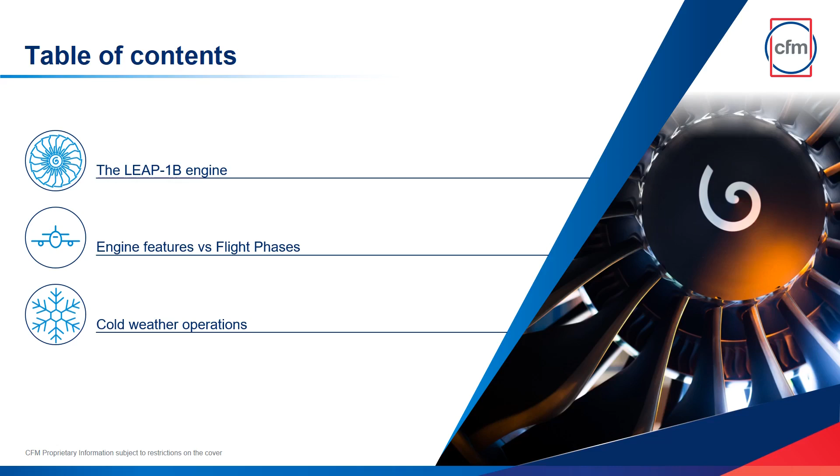We will go through the following topics: the LEAP 1B engine features versus flight phases, from pre-flight phase to engine cool-down, and cold weather operations. Let's begin with a short technical review.

Fuel burn. The B737 MAX has been designed to reach a close to minus 15% fuel burn compared to the NG family. This target has been achieved thanks to design improvements made to the airframe, but most of it is due to a new generation of engines, the LEAP 1B family. On top of that, NOx emissions have been lowered by 50%, and the noise footprint reduced by 75%.

From the outside of the aircraft, the LEAP 1B is bigger than a CFM56-7B. The jet intake is 1.76 meters wide, which is 20 centimeters bigger than the one on the CFM56-7B.

The ground clearance is 43 centimeters, which is compliant with all the certification rules, and does not induce any limitations in bank angle for landing. Even in the case of a landing with the nose wheel retracted, the engines will not touch the ground.

The improved fuel efficiency of the LEAP 1B engine is due in part to its larger fan. The LEAP's new bypass ratio is 9:1, compared to the 5:1 bypass ratio of the CFM56-7B. The larger bypass ratio is responsible for 50% of the LEAP 1B's gain in fuel efficiency.

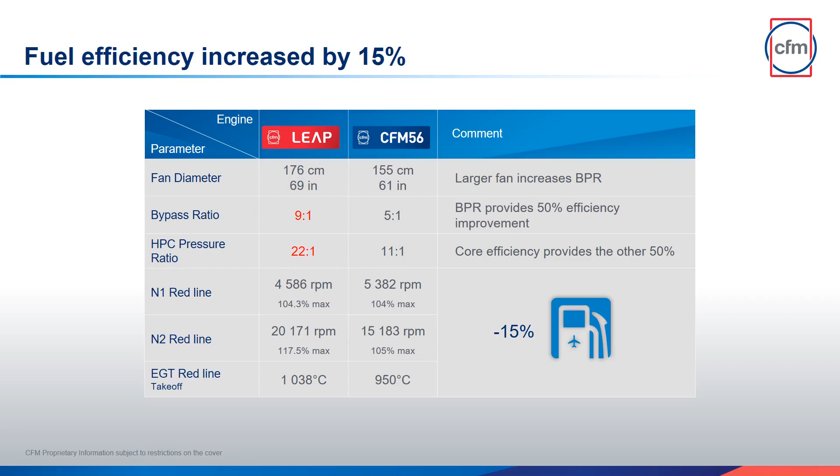Aft of the fan, the majority of the air flows into the secondary airflow, where approximately 80% of the engine's thrust is developed. The remainder of the air passing the fan enters the engine's core, becoming the primary airflow.

Primary air flows into the three-stage low-pressure compressor, also known as the booster. Between the booster and the high-pressure compressor are the variable bleed valves, or VBVs. The VBVs are designed to avoid stall occurrences in the booster by discharging a portion of the booster's air into the secondary airflow, while the engine is operating at low RPMs or during sudden RPM changes.

The VBVs open into the primary airflow and behave like scoops, catching any foreign objects that could have been ingested by the booster and evacuating them into the secondary airflow, bypassing the engine's core.

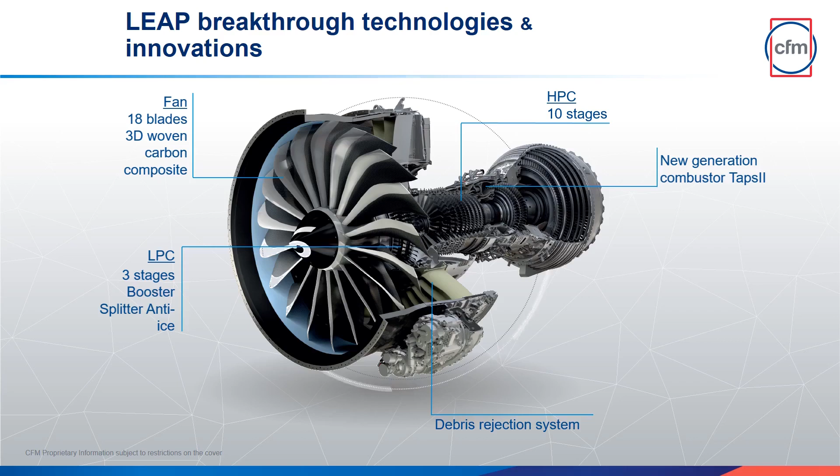After the combustor, the hot exhaust air goes through a two-stage high-pressure turbine, or HPT. The first HPT stage is surrounded by a ceramic composite shroud, and the second HPT stage is surrounded by a cooled metallic shroud. Before leaving the engine, exhaust air passes through a 5-stage low-pressure turbine, or LPT.

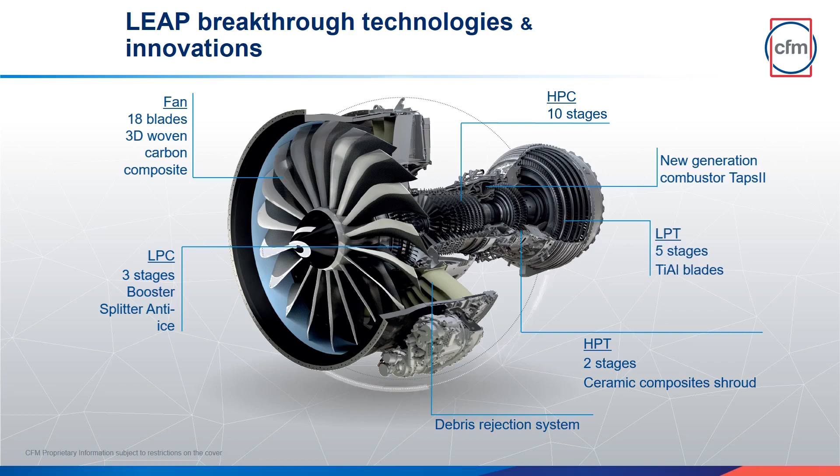The LEAP 1B family of engines provides a range of thrust from 23,000 pounds to 28,000 pounds. The only difference between these engines is the delivered thrust. The hardware is the same, but the ID plug is different. The ID plug is an electronic device plugged into the engine's FADEC computer that changes the operating characteristics of the engine, resulting in changes to its maximum thrust output.

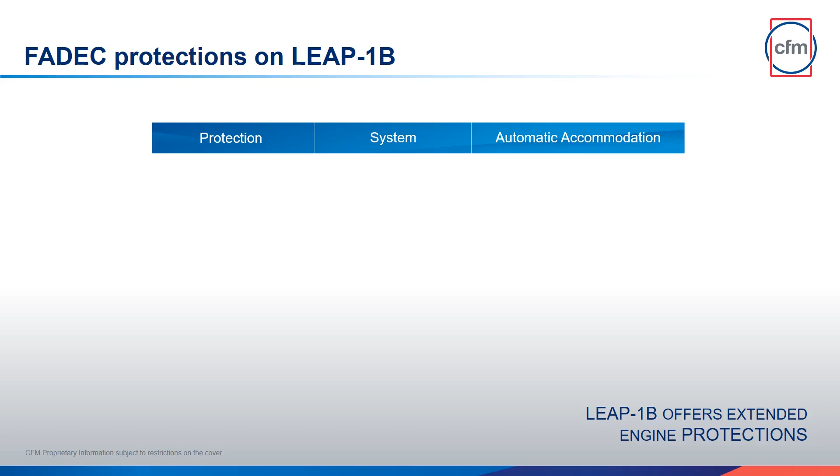Engine protections. The engine control is called FADEC, for Full Authority Digital Engine Control. Beyond basic engine control, the FADEC also actively protects the aircraft. In case of an N2 engine overspeed, an electronic overspeed system, EOS, independent from the main engine calculator, will command an engine shutdown to prevent it from bursting.

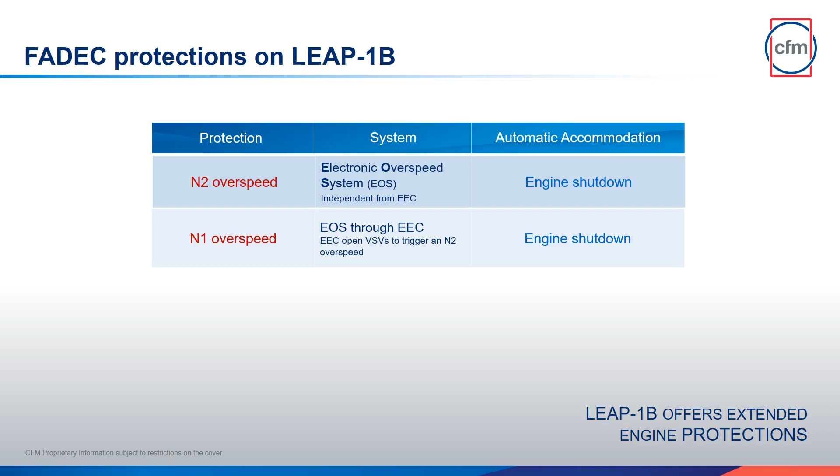In case of an N1 overspeed, the main calculator will detect it and will trigger the EOS, resulting in an engine shutdown as well. Furthermore, to satisfy certification rules, the engine is equipped with a Thrust Control Malfunction Accommodation Device, known as TCMA. In case of an abnormal commanded engine deceleration, to avoid any lateral loss of control due to an excessive thrust dissymmetry, the TCMA will command an engine shutdown on the engine that is not responding normally. This device is only active during takeoff and touchdown phases when on the ground.

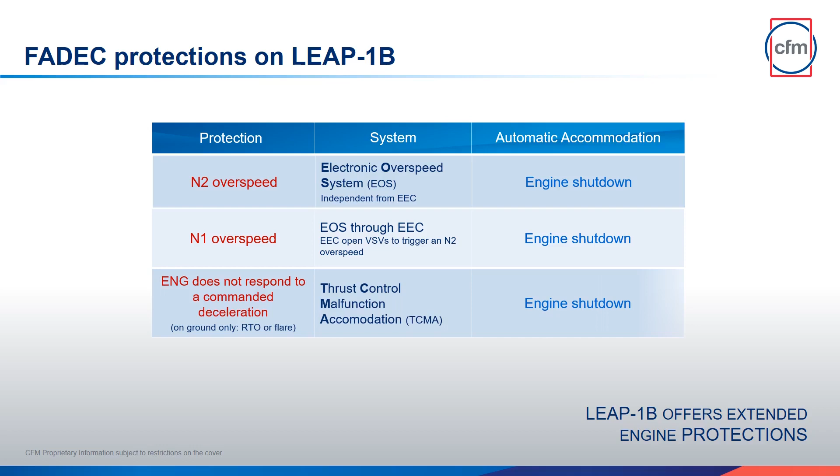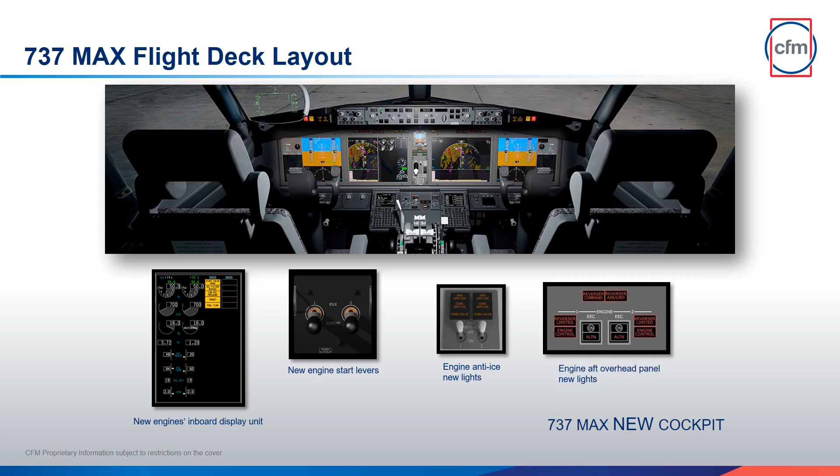On the engine parameter display, you will find 2 new lights. The thrust alert light, which will light up if the thrust is different from the commanded thrust or if the N1 goes above its amber limit. And the fuel flow alert light, in case of an abnormally high fuel flow.

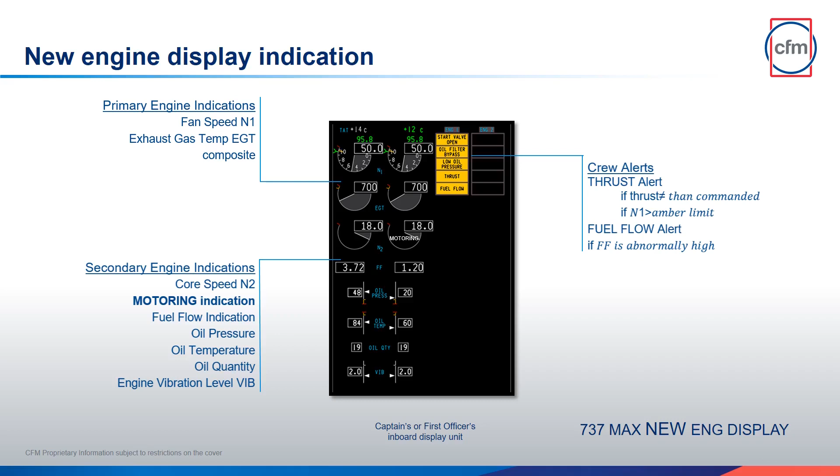The engine start levers are equipped with a red light which will illuminate in the event of an engine fire or during an engine fire test.

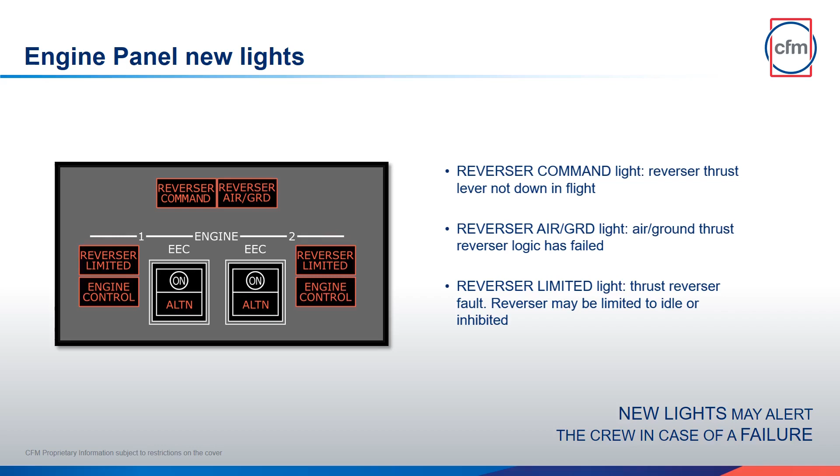The engine panel is also equipped with new lights. The reverser command light will illuminate if the reverser lever is not down in flight. The reverser air ground light will announce the air ground reverser logic has failed. And the reverser limited light will illuminate in case of an inhibited or idle limited reverser.

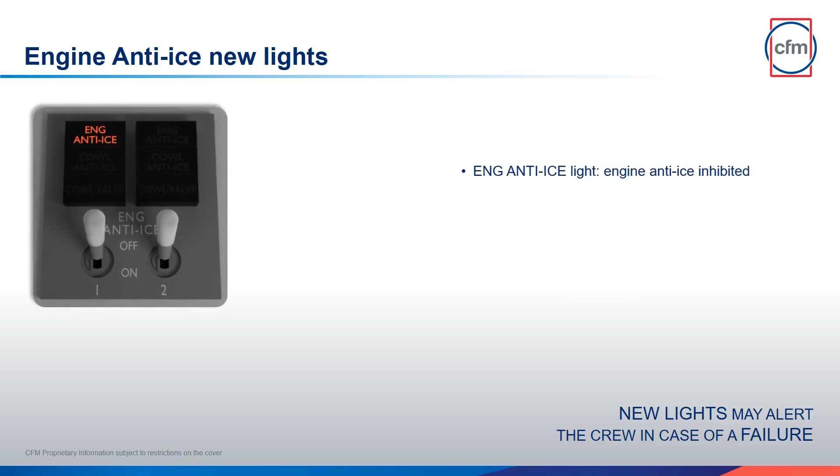The engine anti-ice panel is different from the one installed on the NG. All lights are amber. The engine anti-ice light will illuminate if the system is inhibited. The cowl anti-ice light will announce an overpressure condition. And the cowl valve light will illuminate when the cowl valve position disagrees with the switch position. Thus, it will momentarily illuminate when the related switch is moved, indicating a transient condition.

Exterior inspection. Now, let's go through a visual tour of the LEAP 1B.

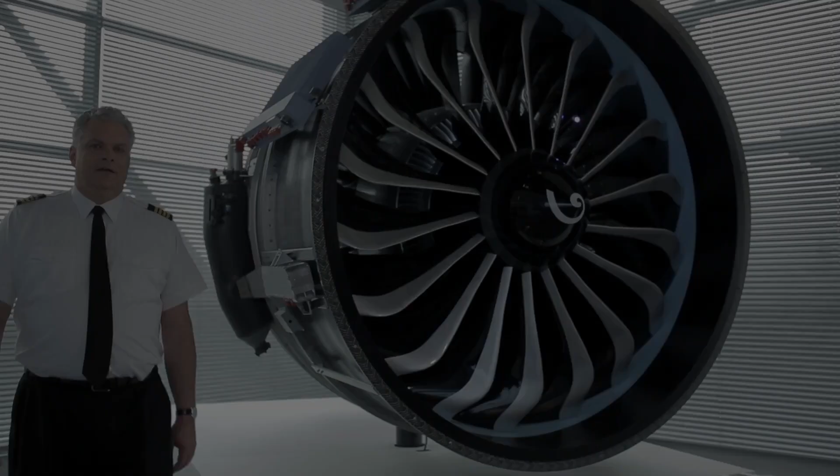Dear flight crews, you're about to operate the LEAP 1B engine on the 737 MAX family of aircraft. As this is a completely new motor, CFM wants to share with you some nice to know visual clues which will help you understand what you may encounter during the pre-flight visual inspection of your engines. These tips are intended to increase your knowledge of engine characteristics, thereby avoiding unnecessary maintenance actions and delays. Let's go for a short LEAP 1B visual tour, ready to fly.

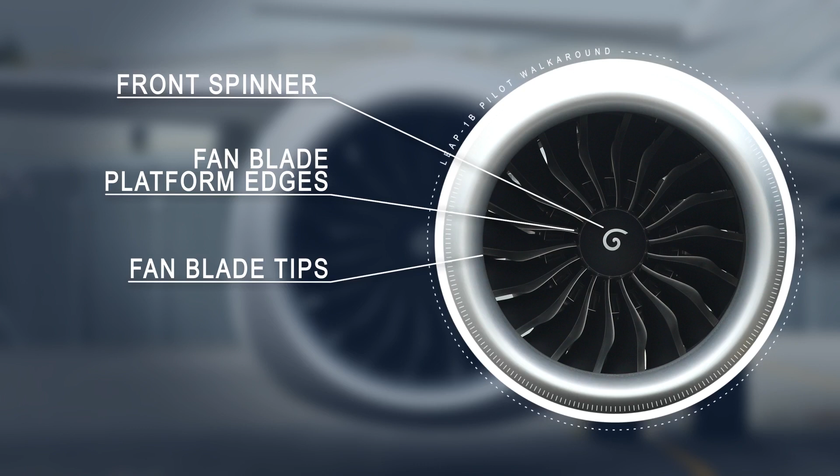In front of the engine, some details may catch your attention, especially on the front spinner, the fan blade platform edges, the fan blade tips, and the fan abradable. You may observe some paint peeling on the front spinner. The paint peeling is due to erosion or foreign object damages, also called FOD. With paint peeling on the front spinner, the engine is perfectly serviceable.

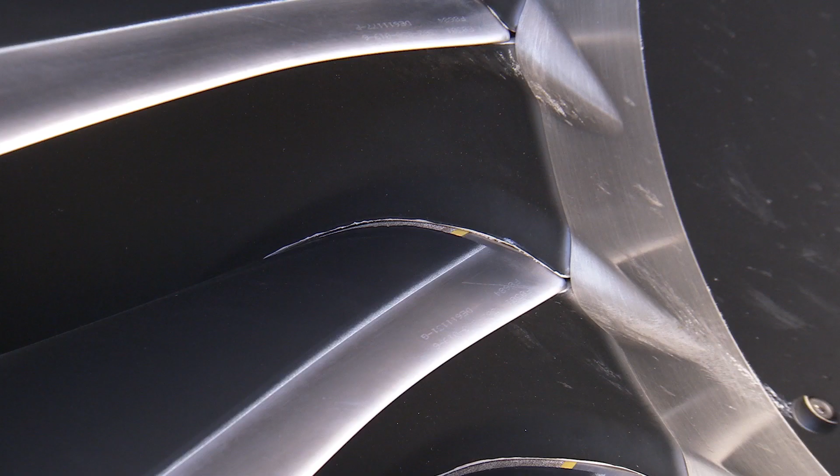You can go. On the fan blade platform edges, you may observe some irregularities. Those irregularities are due to the manufacturing process. With fan blade platform irregularities, the engine is perfectly serviceable. You can fly. You may observe some paint peeling on the fan blades, especially on the rear side of the blades.

This paint peeling is due to natural erosion. With paint peeling on your fan blades, the engine is perfectly serviceable.

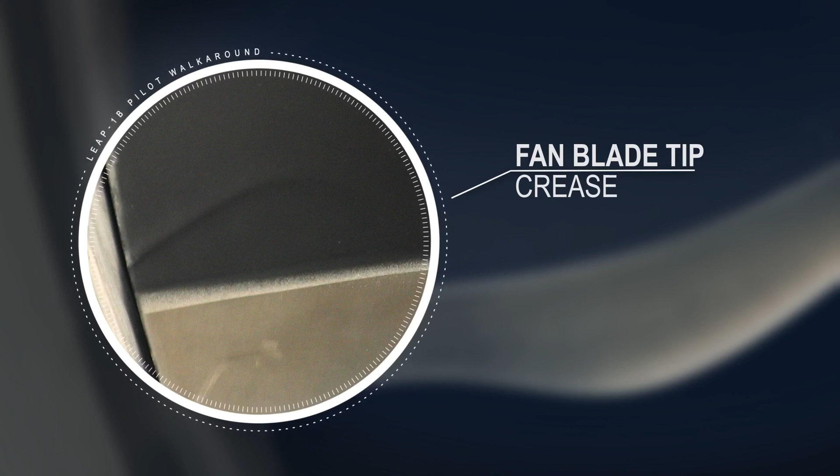You can go. Looking at the fan blade tips, you will notice a slight crease at the junction between the titanium leading edge and the body of the blade. This crease, more or less visible, exists on any blade and is due to the manufacturing process. The engine is perfectly serviceable.

You can fly. On the fan blade tips, you may observe some white dust. This dust comes from the abradable and is due to the normal breaking in process of new production engines. With this white dust, the engine is perfectly serviceable.

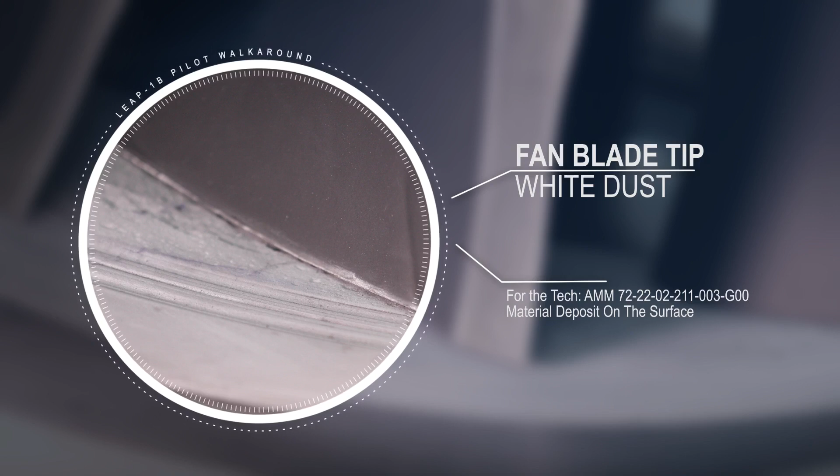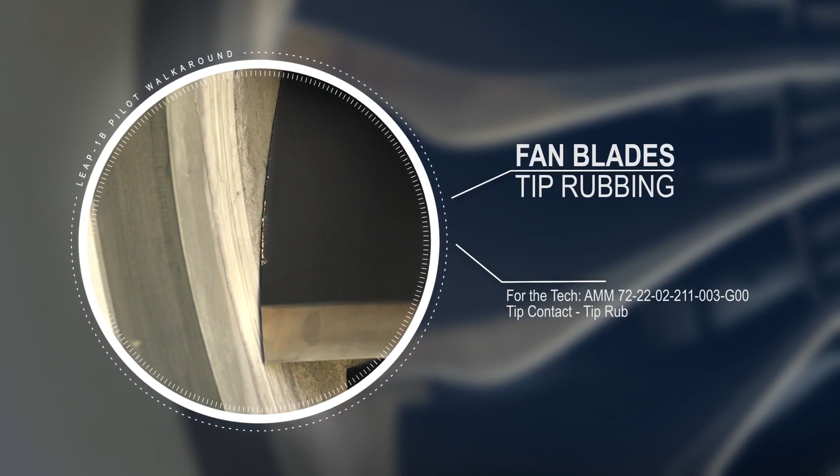You can fly. You may also notice some deteriorated fan blade tips with melt resin and sometimes visible frayed carbon fibers. This deterioration is due to contacts between the fan blade tip and the surrounding abradable during the normal breaking in process of new production engines. With this kind of deterioration, the engine is perfectly serviceable.

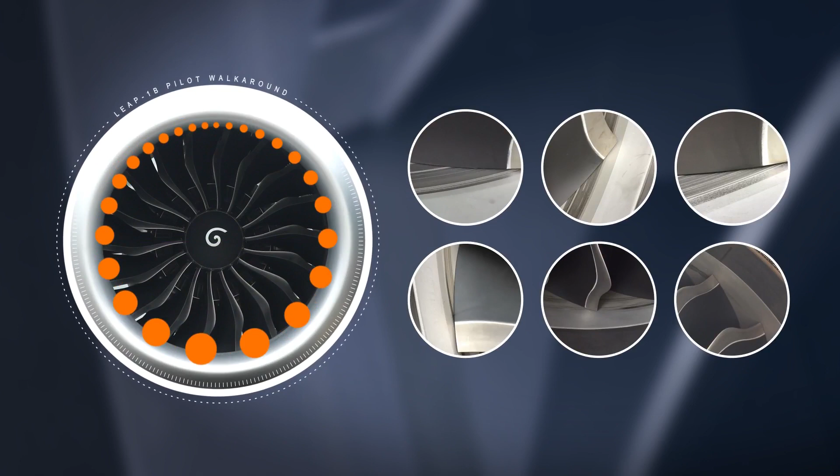You can fly. On the light gray color of the fan abradable, you will notice rubbing marks. The color of the rubbing varies from black to light gray. Furthermore, most of the rubbing will be located, although it may not be limited to, the 6 o'clock position. Those marks are due to the normal breaking in process of new production engines. Whatever the color or location of the rubbing, the engine is perfectly serviceable.

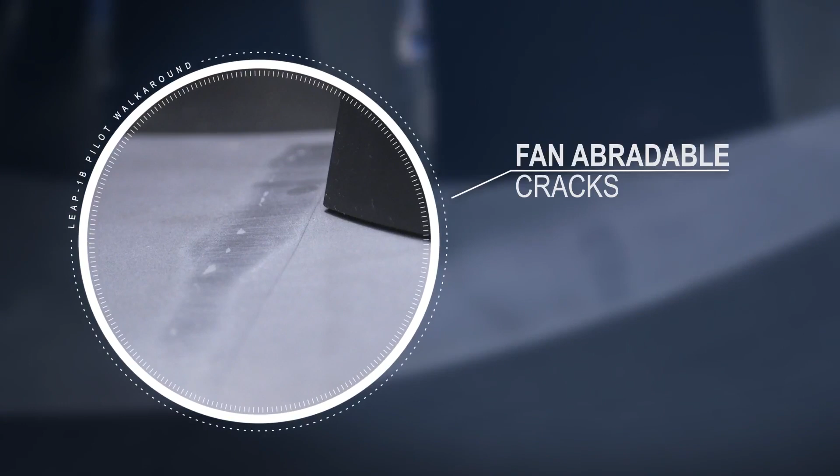You can fly. Looking at the fan abradable, you may notice some cracks. As long as those cracks are axial cracks that just look like a fine axial line on the surface of the abradable, the engine is perfectly serviceable.

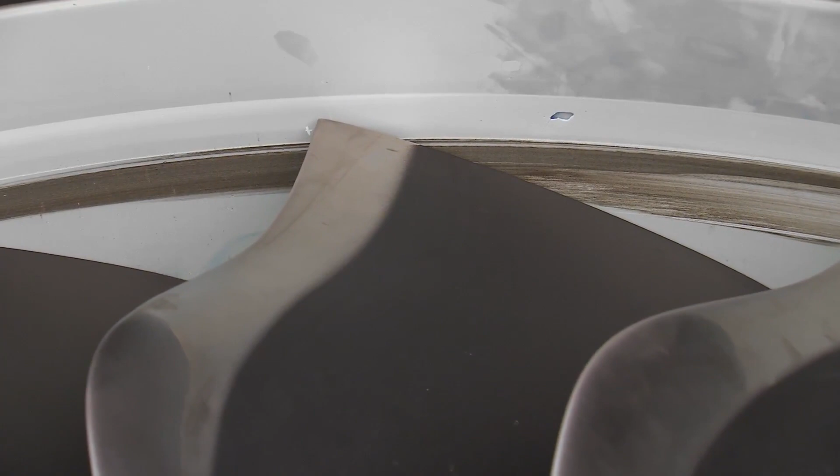You can go. When you have a close look at the fan abradable, you may notice some flaking in the material. This flaking, or presence of small craters, is due to the presence of little air bubbles in the material, or FOD. If the surface of the missing material is larger than a quarter of the surface of a credit card, or if you can see the structural carbon fiber of the composite fan case, ask a technician.

The technician will refer to the aircraft maintenance manual to decide if the engine is serviceable. If the surface of the crater is smaller than a quarter of the surface of a credit card, and you do not see the structural carbon fiber of the casing, the engine is perfectly serviceable.

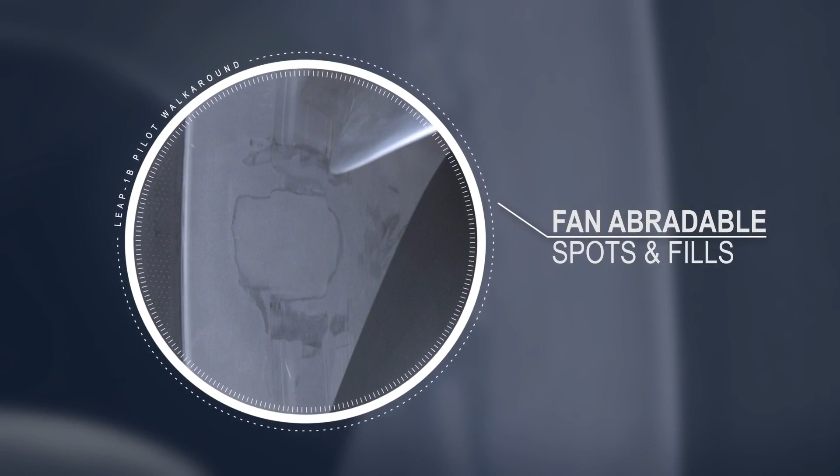You can go. On the fan abradable, you may notice some spots and fills. Those spots and fills are the result of a repaired crater in the abradable. With spots and fills, the engine is perfectly serviceable.

You can go. Looking at the abradable just behind the fan, on the circumference, you may observe some pitting. This pitting is the result of encountering severe icing conditions. With these kinds of small impacts, the engine is perfectly serviceable.

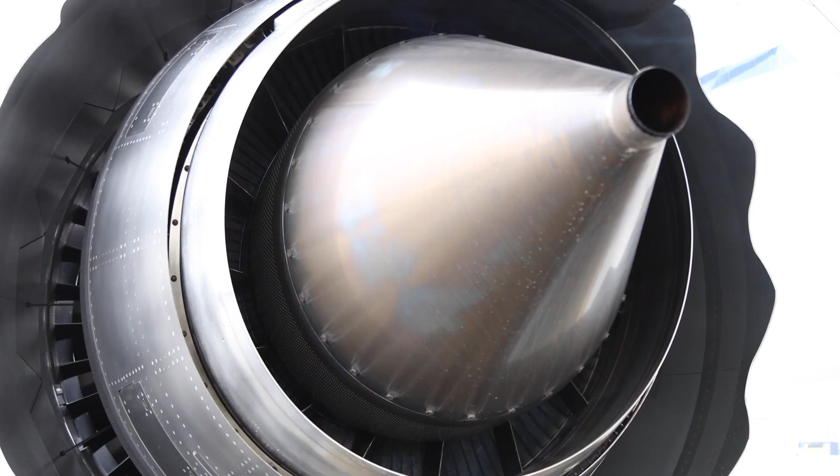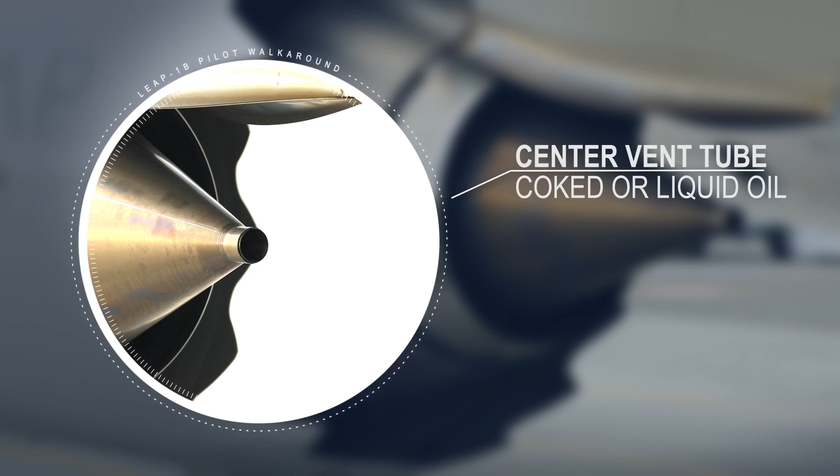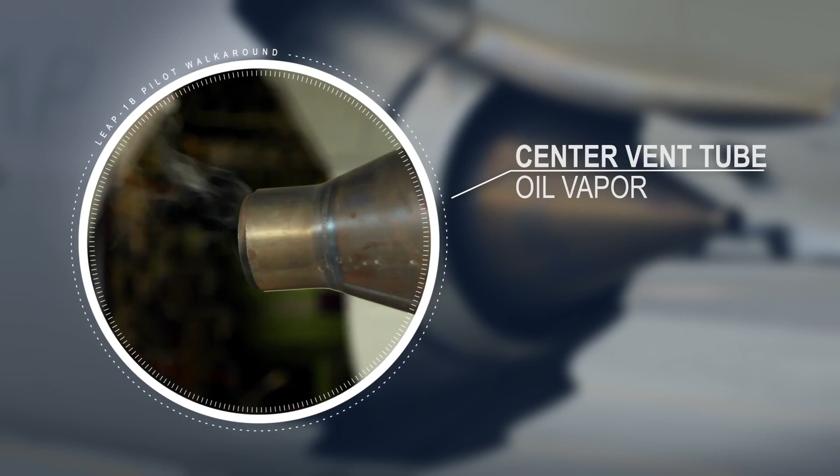Additionally, just after a flight, you may notice some smoke exhausting from the center vent tube. This smoke is just oil vapor. With oil vapor, liquid oil, or coked oil in the center vent tube, the engine is perfectly serviceable.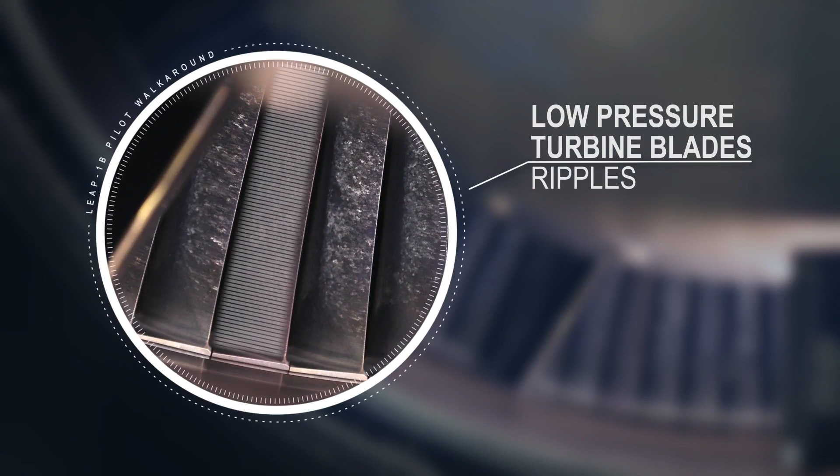You can go. Looking at the low-pressure turbine blades, you may observe ripples along the whole length of the blades. Those ripples are due to the manufacturing process. Furthermore, you may note a discoloration of the metal, and sometimes a different color between blades.

This discoloration is due to the high temperature exposition of those parts. And the color difference is explained by slightly different manufacturing processes, depending on the manufacturer of the blades. Whatever the color of the low-pressure turbine blades, the engine is perfectly serviceable.

You can go. Looking at the side of the engine, some details may catch your attention, especially around the drain masts and below the drain masts. The LEAP 1B is equipped with 2 drain masts.

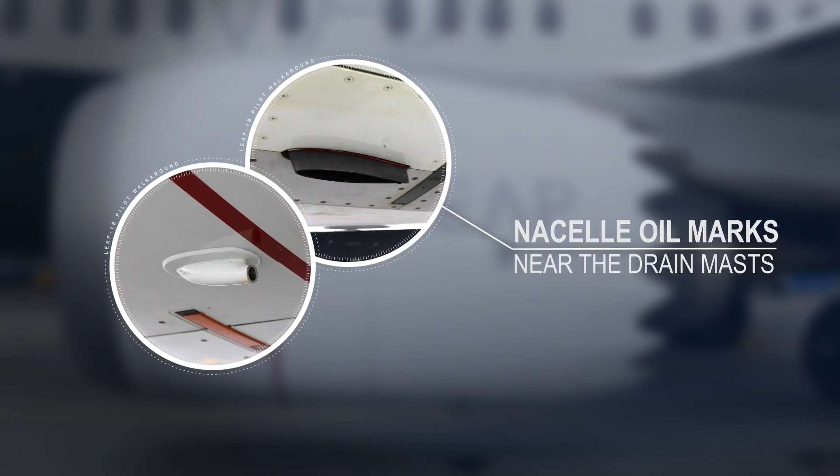Around those masts, you may observe some oil marks. If there is no visible oil leak, just oil marks, the engine is perfectly serviceable. You can fly. Sometimes you will notice, below the drain masts, small oil or fuel puddles.

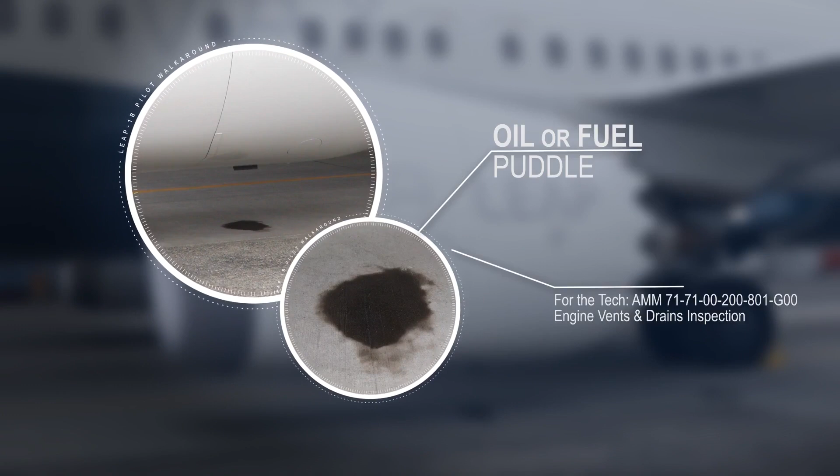These puddles come from the different drain masts. With no visible oil or fuel leak, just a small puddle, the engine is perfectly serviceable. You can fly.

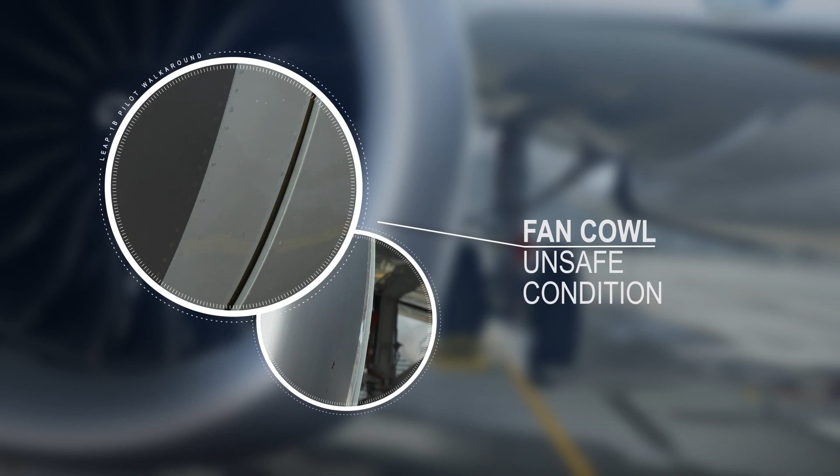In case of an unsafe condition of the fan cowl, some warnings should catch your attention. One of the latches might not be locked, and sometimes an abnormal spacing between the fan cowl and the rest of the nacelle may be visible. In this situation, a corrective action has to be done before you can safely fly the aircraft.

On the ground, the LEAP 1B sounds different from the CFM56. Waiting for the aircraft reaching the apron before your flight, during the engine shutdown sequence, you may hear a pressurized air noise.

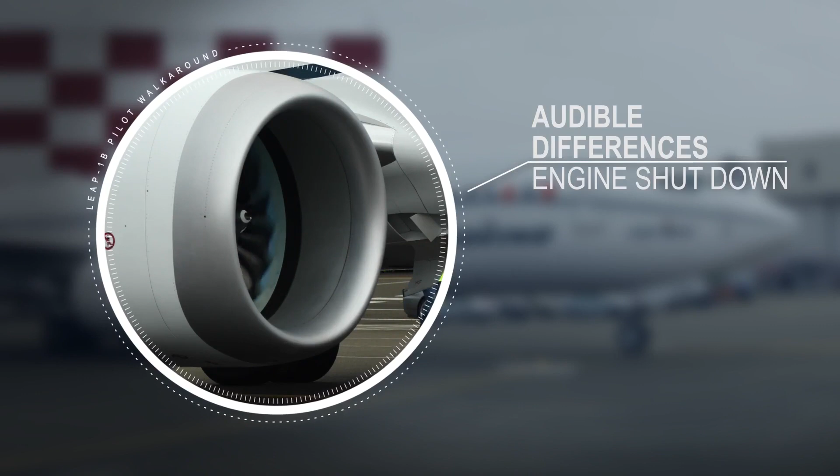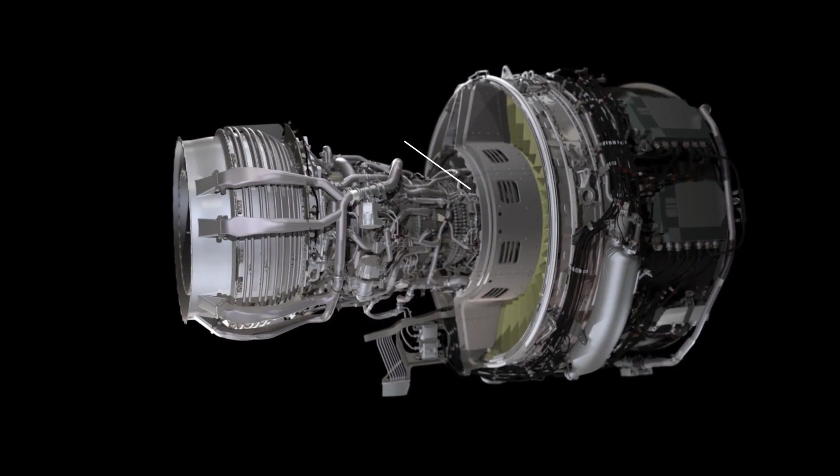This noise is due to the closure of the variable stator vanes, also called VSVs, and the opening of the variable bleed valves, known as VBVs. This noise is normal. The engine is serviceable. You can fly. In certain circumstances, for a short period of time, a grinding noise might be heard.

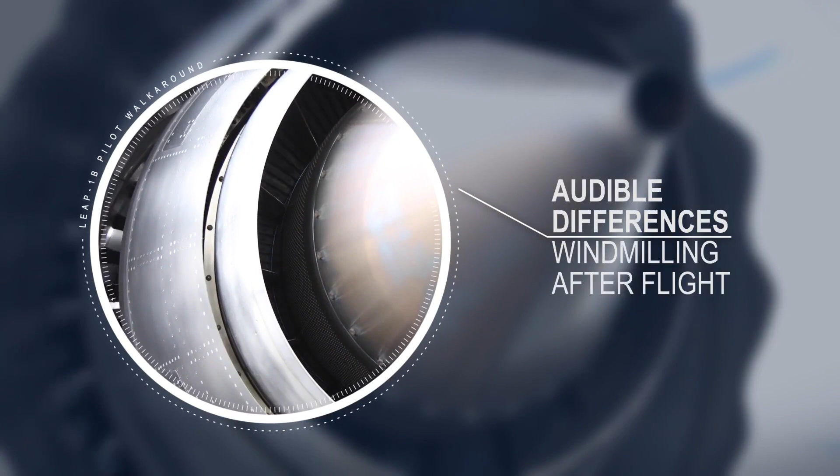This noise comes from the low-pressure turbine blades rubbing on their seals. The motor is perfectly serviceable. You can go. If for any reason, with the engine spinning slowly during the walk-around, you would like to stop the fan, do not stop it by grabbing one of the fan blades.

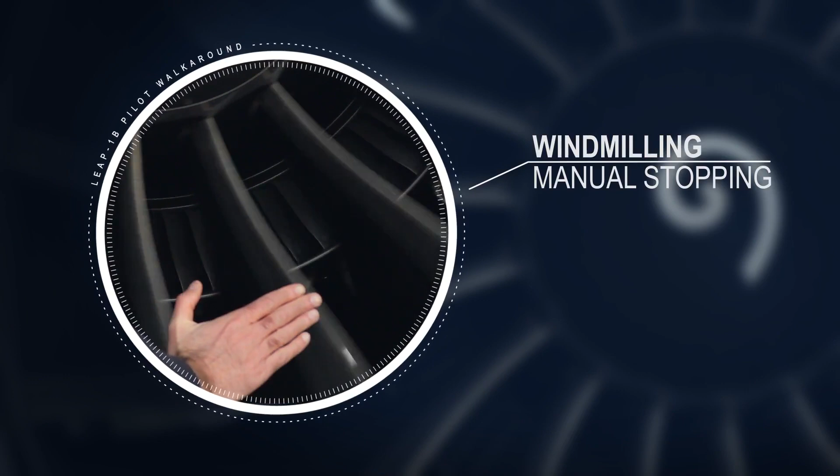Due to the size and shape of the blades, grabbing a blade could make it twist and gouge into the fan abradable. It could also hurt you.

If you want to stop the fan, it is recommended to use your hands on the front spinner to slow down the fan until it stops. Doing so, pay attention not to scratch the spinner surface by rings or wristwatches.

Dear flight crews, the engine is now yours. Take care of it for a safe and long time on wing with no delays or cancellations. Enjoy your new LEAP 1B.

Engine start procedure.

The outstanding efficiency of the LEAP 1B is due to its technical architecture. But this architecture is subject to a bowed rotor effect on engine start when the engine is not cold. The LEAP 1B reaches cold status after a ground stop of 6 to 8 hours. Ground stops shorter than 6 to 8 hours usually result in starting engines already warm from residual heat. Short ground stops contribute to bowed rotor effect on engine start.

To manage the bowed rotor effect prior to start, it is important to minimize the temperature gradient within the engine. Minimizing any temperature gradient within the engine will help maintain clearance control in rotating hardware and ensure performance retention. This is done thanks to the bowed rotor motoring logic, which is active on the ground only.

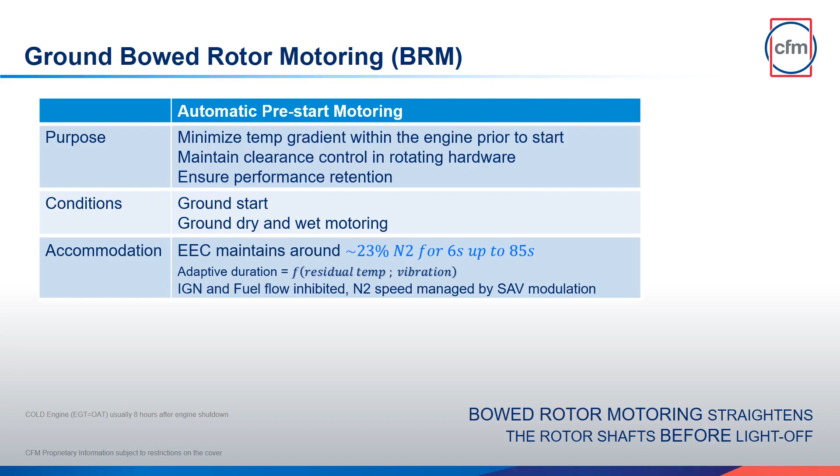During the startup sequence, the electronic engine control, EEC, will maintain N2 around 23% for 6 to 85 seconds, depending on the thermal state of the engine. The motoring message is displayed on the N2 indication during that phase.

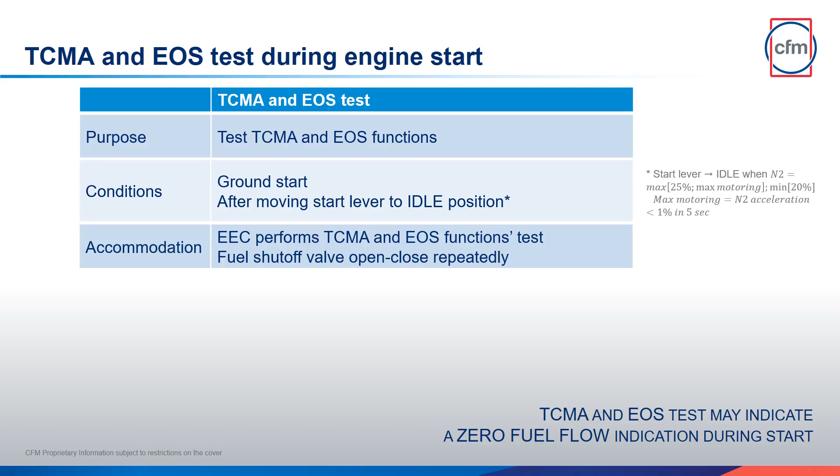Additionally, when the engine start lever is set to the idle position, an embedded functional test is done before light off. This protocol checks the status of the thrust control malfunction accommodation, TCMA, and the electronic overspeed system, EOS. As an operational consequence, you will notice that the fuel flow indicator will read 0 for 3 to 10 seconds, with the bright blue engine valve close light illuminated.

After the motoring message has disappeared, reaching 25% or max motoring, the start lever has to be set to the idle position. At 63%, the start switch will go to the off position, and the start valve open light will go off. With a cold engine, you can expect a startup duration around 90 seconds.

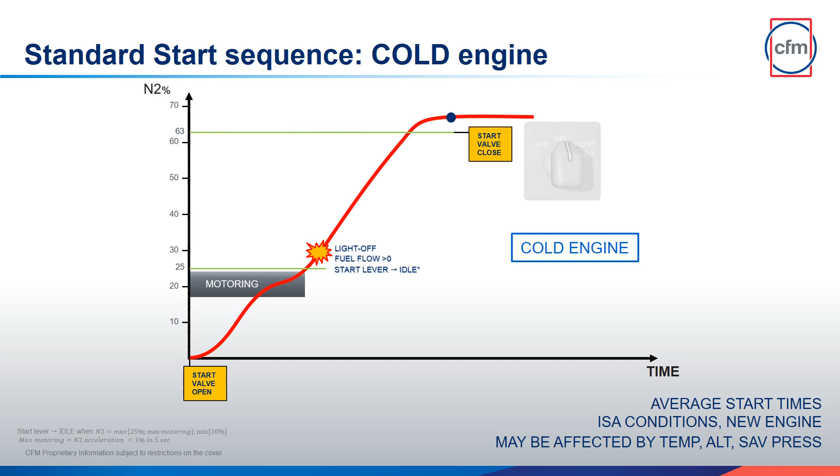This graph represents the N2 over time during a hot engine startup sequence. After the engine start switch has been rotated to the ground position, the N2 will increase. The motoring indication will appear on the N2 gauge around 18% N2. The N2 will be maintained around 23% for a period of time from 6 to 85 seconds.

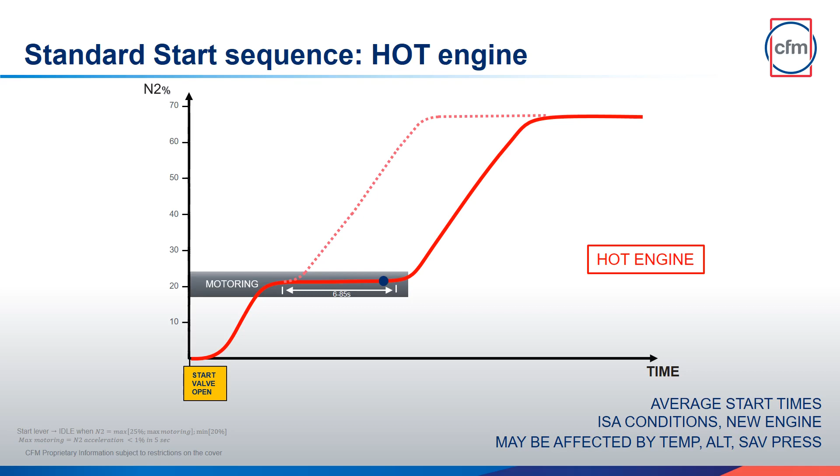This is the bowed rotor motoring. Then, the engine will spool up again. After the motoring message has disappeared, reaching 25% or max motoring, the start lever has to be set to the idle position. At 63%, the start switch will go to the off position, and the start valve open light will go off. With a hot engine, you can expect a startup duration between 91 and 120 seconds.

Note: the extended bowed rotor motoring cycle will also occur during the first start after new engine installation, or if EEC logic is updated.

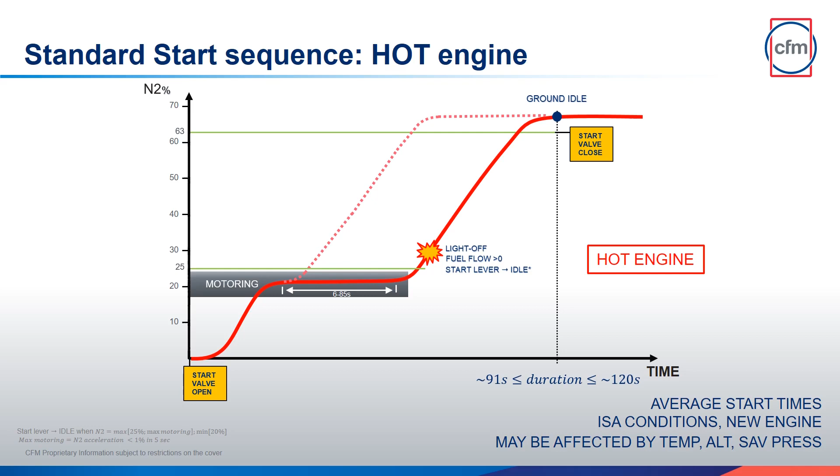During any ground start, the electronic engine control protects the hardware from anomalies such as hot start, over temperature, no light off situation 15 seconds after the start lever is moved to idle detent, and start stall.

CFM recommends not to intervene during the startup sequence and let the EEC do its job. If an aborted start is necessary, the EEC will automatically abort the start by turning off fuel and ignition. Allowing the EEC to abort the start instead of manually aborting it will allow the full benefit of the EEC adaptive start capabilities during the next ground start.

After an automatic start abort, the EEC will keep the engine motoring and will adjust the fuel flow schedule for the next startup attempt. The flight crew will have to set the engine start lever to the cutoff position once the EEC has aborted the sequence.

During the start sequence, it is not unusual to see EGT levels very near the start EGT limit. The rate of EGT increase is typically low when approaching the start EGT limit. Be patient. The EEC will manage that situation without any pilot intervention.

Furthermore, the LEAP 1B usually has two subtle EGT and N2 rollbacks, or slower rate of increase. The first typically occurs after starter cutout. The second rollback occurs just prior to the engine reaching stable idle.

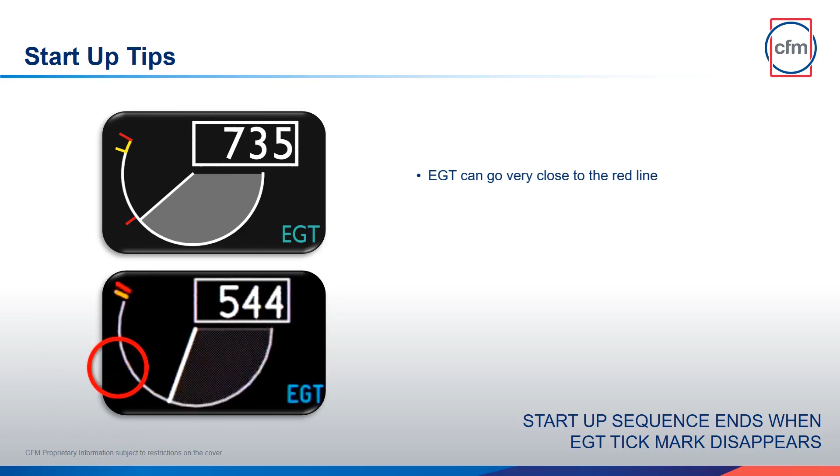The EGT and N2 rollbacks are not a sign that the startup sequence is complete, and no bleed configuration changes or generator selections should be accomplished until the start EGT tick mark disappears from the EGT indication. The disappearance of the start EGT limit is the indication that the start process is complete.

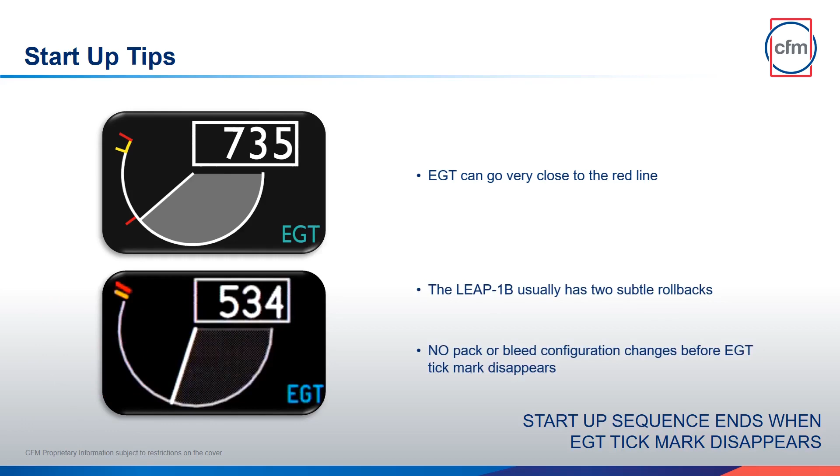Let's now have a look at cold and hot engine startup sequences.

LEAP 1B startup sequence, cold engine. Engine start switch rotated to the ground position. EEC powered. Start valves open and red tick mark appears on the EGT gauge. Remaining EGT shows the engine is cold. 18% N2, motoring indication displayed.

N2 keeps spooling up. 25% N2, start lever moved to the idle detent. Fuel flow at 0 for a few seconds. Fuel flow increases and light off.

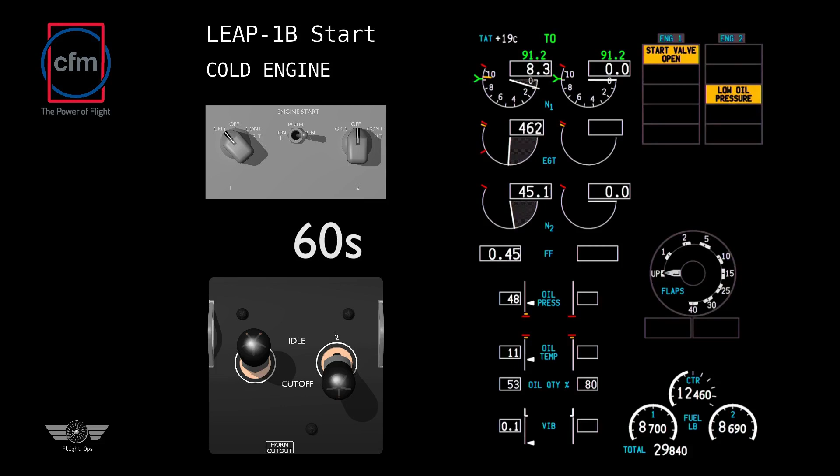The EGT peaks can go very close to the EGT red line. First EGT peak. Second EGT peak.

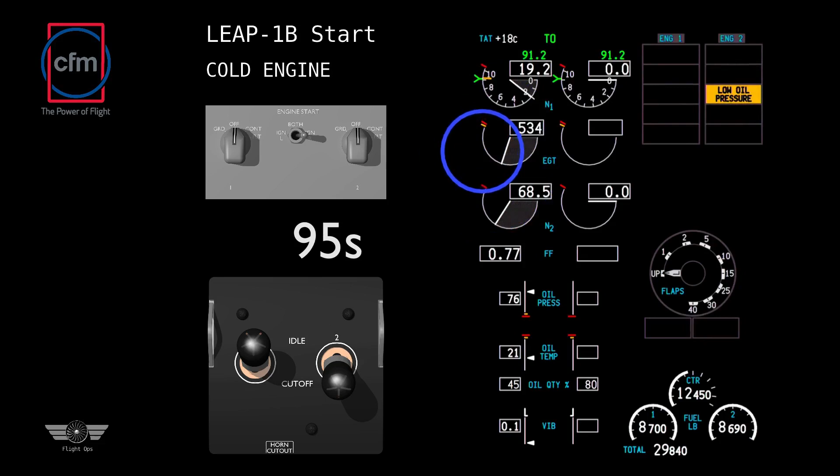63% N2, start switch rotates to the off position. Starter cutout. It is not unusual to see another EGT peak after starter cutout. EGT red tick mark disappears, indicating the end of the startup sequence.

Hot engine. Engine start switch rotated to the ground position. EEC powered. Start valve opens and red tick mark appears on the EGT gauge. Remaining EGT shows the engine is hot. 18% N2, motoring indication displayed.

N2 stabilizes around 23% and the motoring indication remains visible.

Motoring disappears and N2 spools up again. 25% N2, start lever moved to the idle detent. Fuel flow at 0 for a few seconds. Fuel flow increases and light off.

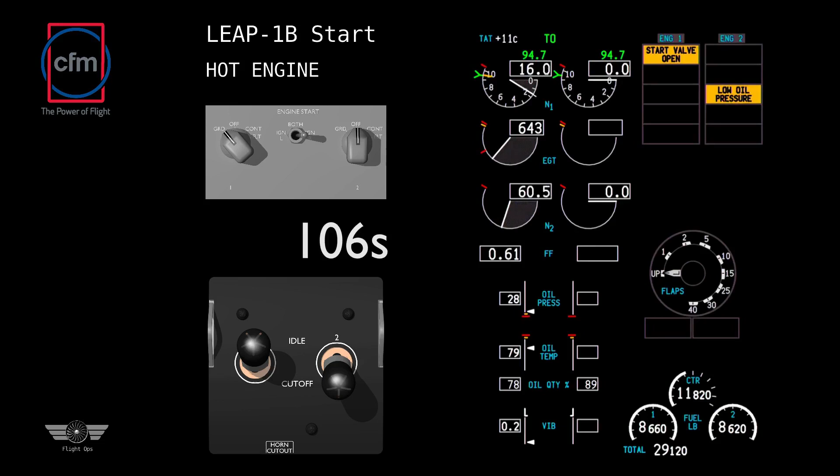63% N2, start switch rotates to the off position. EGT peak. The EGT peaks can go very close to the EGT red line. EGT red tick mark disappears, indicating the end of the startup sequence.

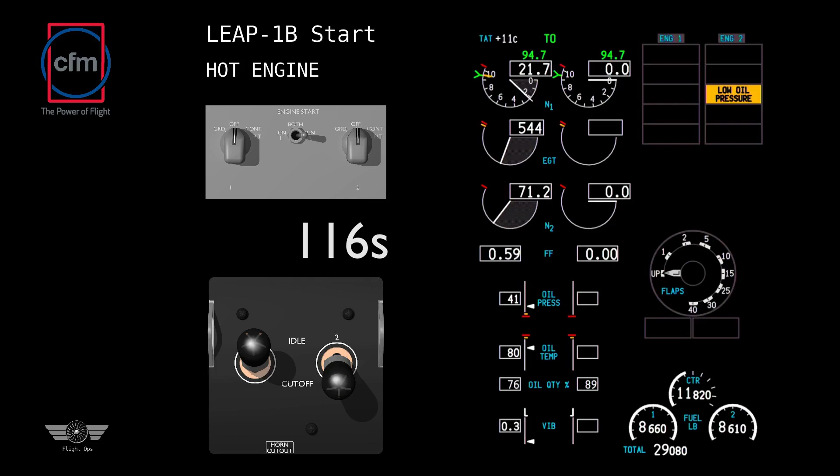Taxi. The LEAP 1B keep-out zone is larger than the CFM56 zone. Keep this in mind when you are beginning to taxi or approaching the apron, for the safety of ground personnel.

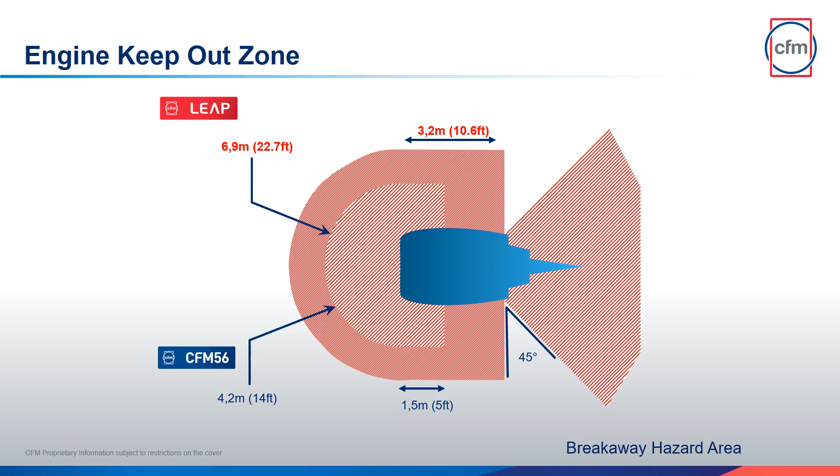Engine warm-up. Before applying takeoff thrust, there are two very important points to check. Make sure the engine has 3 minutes of warm-up. The minimum oil temperature prior to setting takeoff thrust is 31 degrees Celsius.

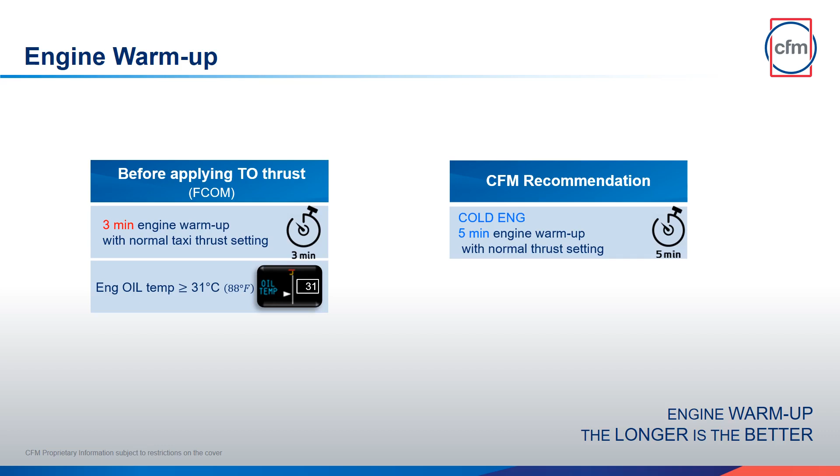For cold-soaked engines, extending the engine warm-up time to 5 minutes is beneficial to slightly lower EGT during high-thrust takeoffs. This is often beneficial at higher altitude airports, where higher thrust levels are typically required.

Takeoff. Let's have a look at the thrust reduction methods.

Today, with this current temperature and using max takeoff thrust, you could take off at max takeoff weight. But today, your current takeoff weight is lighter than the max takeoff weight. Thus, what lower thrust level would be sufficient thrust to use for takeoff at this takeoff weight?

It is the thrust the engine would produce if the current outside air temperature was the assumed temperature. This target thrust is computed with the current conditions of the day, leading to a reduced takeoff N1 and a reduced takeoff EGT. Refer to the FMC options for the maximum possible thrust reduction using the assumed temperature method.

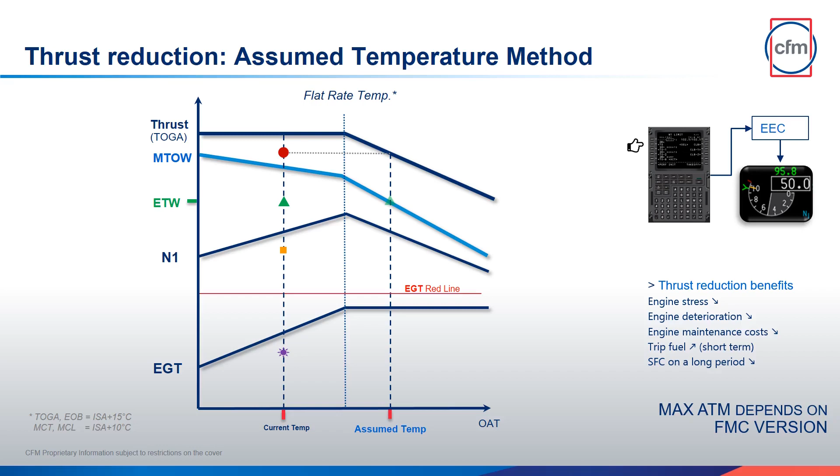The other way of reducing the takeoff thrust is to use a fixed derate. The fixed derate levels correspond with the derate options selected from the FMC. The fixed derate option limits the takeoff thrust to the selected fixed derate, which is the basis for takeoff performance calculations.

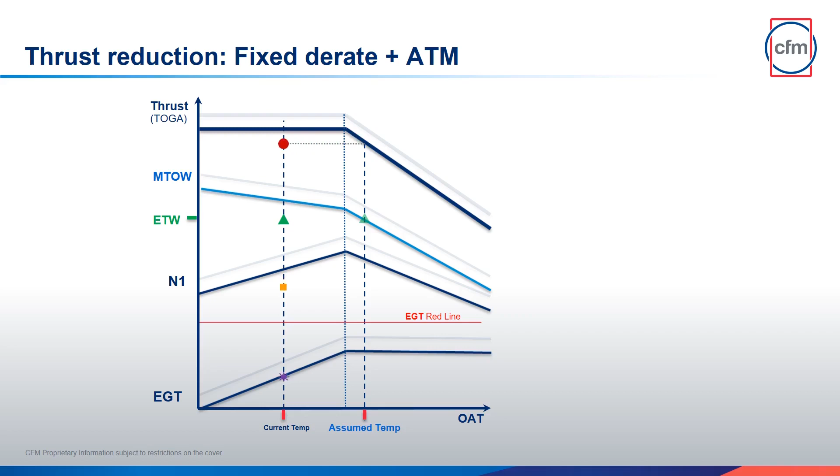It is possible to apply the assumed temperature method with a fixed derate thrust. In this case, the computation lines of the derated engine start at lower levels. Once the fixed derate has been chosen, the assumed temperature method is applied. As the baselines are lower, the new assumed temperature might be lower, but the overall thrust reduction can be equal or greater than using the assumed temperature method alone. Refer to your FCOM for maximum thrust reduction authorized.

Climb. The FMC will automatically calculate the best climb thrust based on the takeoff thrust level. CFM recommends using the automatically armed climb thrust instead of manually selecting a higher climb thrust to minimize overall engine deterioration.

Cruise. In cruise, you will notice that the LEAP 1B fuel flow is much lower than the CFM56 one. Sometimes, you will even read values lower than 1 ton per hour.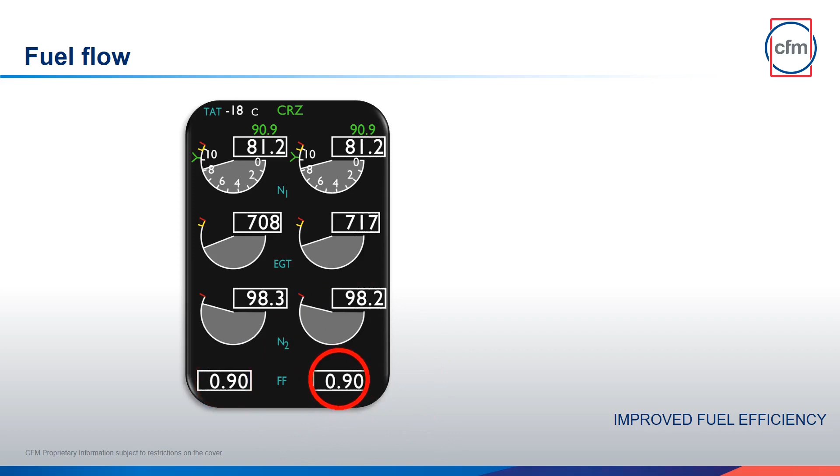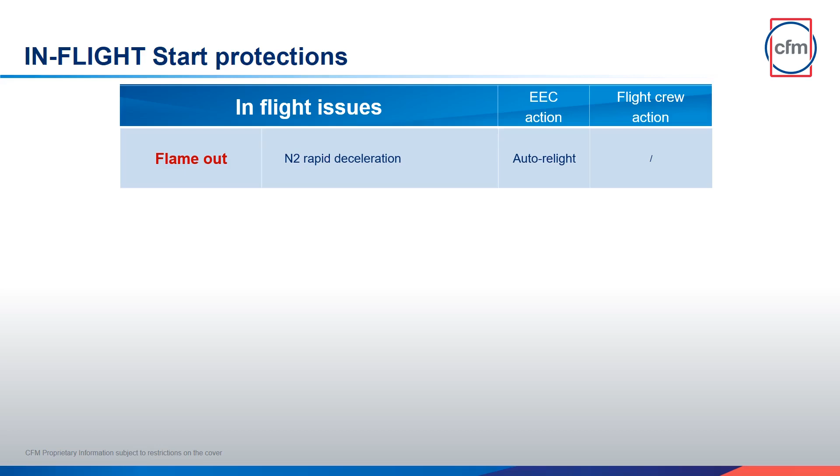In flight, in case of an engine flameout, the EEC will activate the auto relight feature. If you need to manually restart one engine, be aware that in contrast to what is done on the ground, the EEC will never shut down the engine in case of hot start or overtemp situation. Nevertheless, CFM recommends you let the EEC do its job. If a hot start situation is detected in flight, the white flashing box will appear, and the EEC will interrupt fuel and ignition for 1.2 seconds to avoid reaching the EGT red line. However, the start process will continue.

You'll need to abort the start sequence in flight only in the case of an overtemp situation, indicated with the red box. Furthermore, if a start stall is detected, the EEC will interrupt fuel and ignition for 1.2 seconds, then continue with the start process. The flight crew has nothing to do, just monitor the EGT red line.

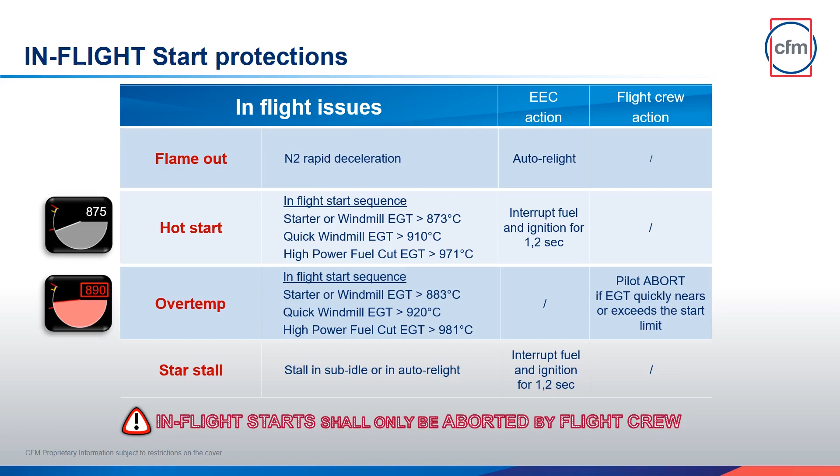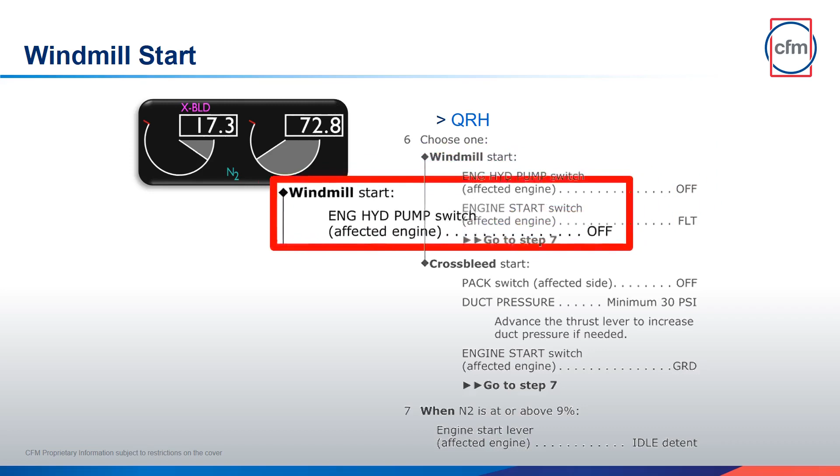If you need to perform a windmill start, carefully read the non-normal checklist. You will see that there is an additional step asking to switch off the engine hydraulic pump on the affected engine. This is important because engine-driven pump drag greatly influences the windmilling speed of the engine.

Descent. Depending on the flap's position and the engine anti-ice status, the flight idle thrust changes. This table comes from the FCOM. Just be aware that icing idle is higher than approach idle, which is itself higher than flight idle.

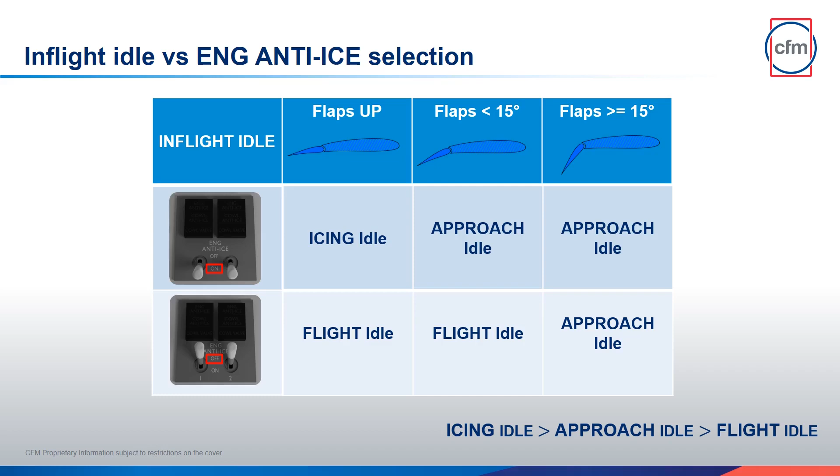Landing. Thanks to its higher bypass ratio, the LEAP 1B thrust reverser is very effective. CFM recommends coming out of max reverse by 70 knots to minimize the potential for reverse gas flow and FOD ingestion.

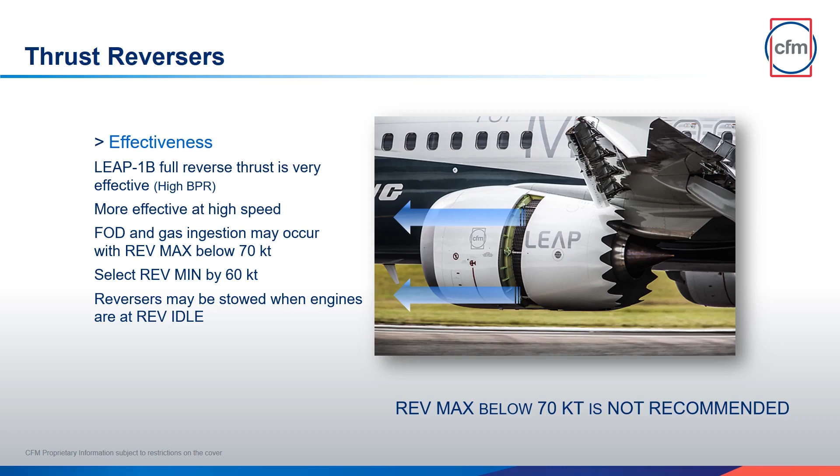Engine cooldown. The cooldown period can begin when the aircraft is on the ground at idle thrust. Thus, if an idle reverse landing is performed, the cooldown time begins at touchdown. If reverse thrust higher than idle is used, the cooldown time starts when the engines are returned to idle thrust. The minimum required cooldown time is 3 minutes and must be followed to minimize the potential for oil and fuel coking effects. Those fluids will bake into coke when in contact with hot parts.

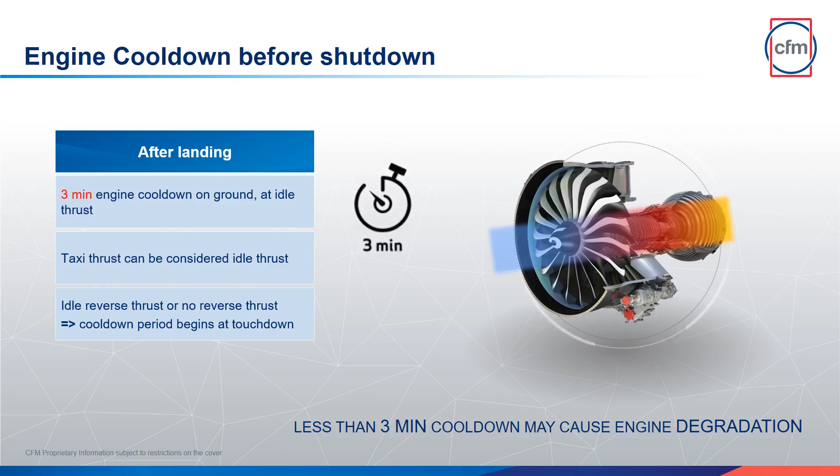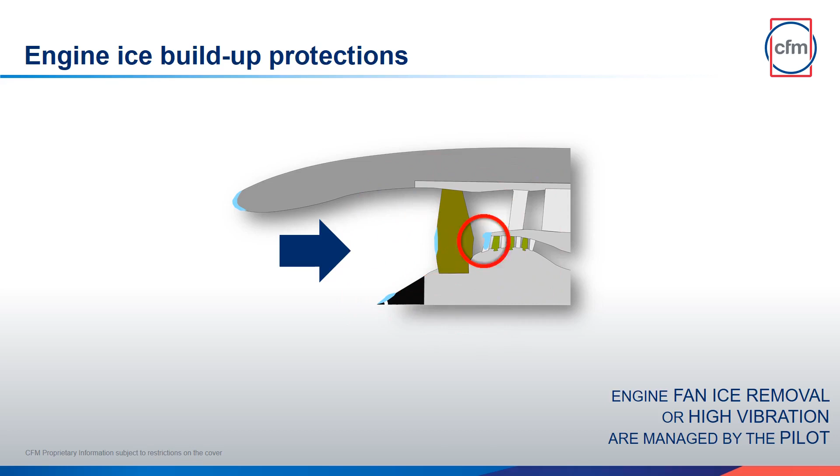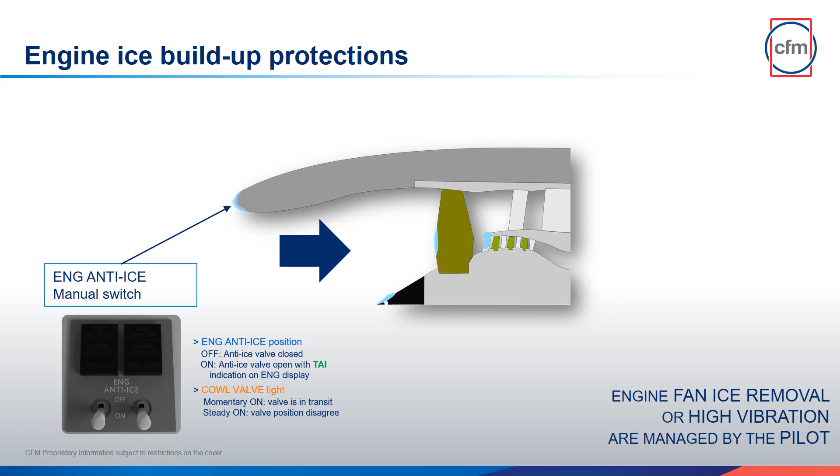Cold weather operations. Here are the different parts subject to icing in the LEAP 1B: the engine air inlet, the front spinner, the fan blades, and the booster splitter. For the air inlet, use the engine anti-ice switches. Note that all lights are now amber. For the front spinner and the fan blades, use the fan ice removal procedure when flying in moderate to severe icing conditions. It is the only way to be protected from ice accumulation on the spinner and the fan blades.

As for the booster splitter, it is automatically de-iced. The EEC controls this feature, which is activated at low RPM. There is no cockpit indication of the system activation. The booster splitter can be subject to ice accretion. To de-ice this area, hot air is injected in the splitter and blown onto the blades of the first stator stage.

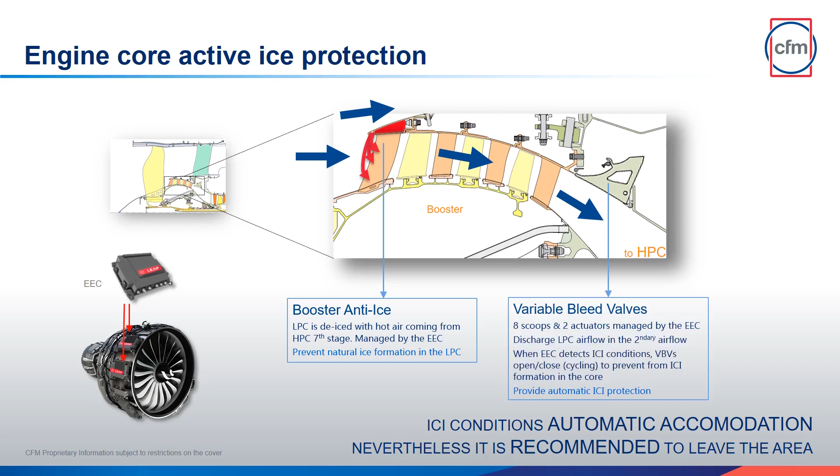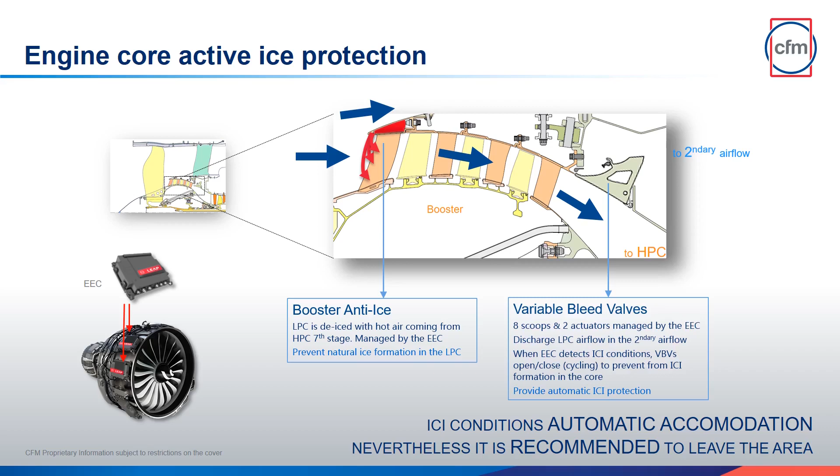The LEAP 1B can also defend the engine's core from ice crystal icing conditions. To prevent ice accumulation in the core, the EEC will command an opening and closure cycle of the variable bleed valves. This is automatic, and there is no cockpit indication. A slight change in EGT might be observable. Nevertheless, if ice crystal icing is suspected, CFM recommends to leave the area, as you would do with a CFM56-7B. For taxiing in icing conditions, refer to your FCOM.

The LEAP 1B ice shed procedures are required when operating in ground icing conditions.